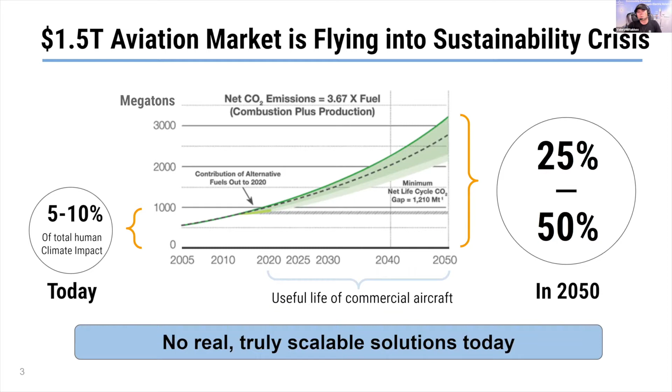So aviation is really becoming this outlier, and there is no real solution today. If you go to the large airlines, large operators, all they talk about right now is offsets and carbon offsets, carbon credits, trading, and all those things, which are all fake sustainability in our opinion. So we really need to solve this through technology.

As you know, everybody wants to fly. As soon as the quality of life increases to a certain level, people want to get on the plane, want to go on vacation, want to go to that business meeting. A lot of new airports are built in the developing world, in China - a huge number of new airports.

Everybody wants to fly. And then, as presented in the previous panel, the whole 3D sort of personal transportation revolution is upon us and will be coming in. Of course, here is the Fifth Element - nice movie, for those who haven't seen it - but very visionary, and that's what we're going to have. That's a lot of additional aircraft in the air. So we need to solve it.

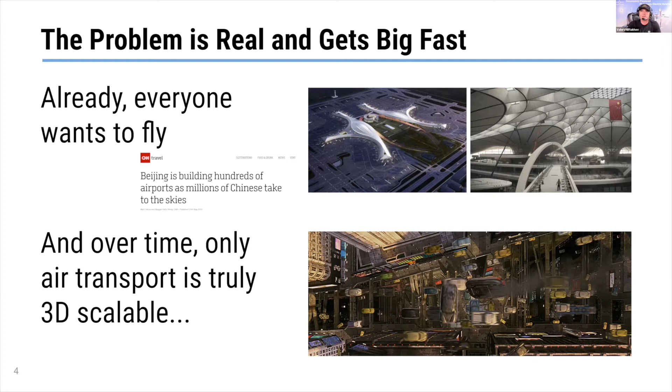So how do we solve it? There are basically 6 different ways to think about it. We at ZeroAvia, as we started about 3 years ago, did this thinking from the first principles perspective. I'm a physicist myself, PhD in physics. My management team is similarly suited as well, and we looked at the fundamental physics of various solutions.

So of course you have batteries - this is the first one here. Then you have turbine hybrids. Then you have biofuels, then synthetic fuels. Then you have hydrogen turbines, which is interesting - we'll talk a little bit about it. And then hydrogen electric, hydrogen fuel cell, and electric motors. We looked at all of these from a fundamental perspective - energy density, efficiency, theoretical limits, all of that.

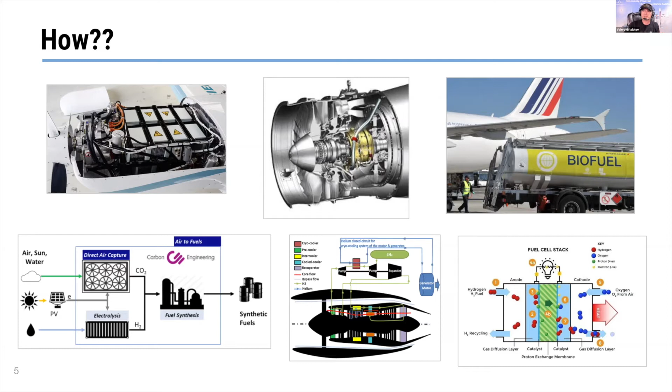And this is what we found. On battery electric, we just have fundamental blockers - and again, I'm not going to spend a lot of time, we already talked about it, energy density and all of that. In addition, cycling material, sourcing issues and whatnot. Turbine electric, yeah, could work, but it doesn't really make any sense - you're not extracting any significant fundamental improvements in fuel efficiency. Biofuels can't really scale - if you look at plants as a way to convert sunlight into fuel, that's just dumb.

It's not getting any kind of efficiency. It's 500 times less efficient than solar electrolysis on the same piece of land. You're not even talking about the water issues, environmental impact of agriculture, and all those things.

So really, what remains on the bottom is our 3 hydrogen-derived solutions. Synthetic fuels take hydrogen made through electrolysis, zero emission, because no other way of making hydrogen will really scale. So you make hydrogen in each of those cases. In the first case, you have a chemical plant to convert that hydrogen into synthetic fuel. The benefit is you can use that synthetic fuel in existing engines and call it a day, at least on the CO2 emissions basis.

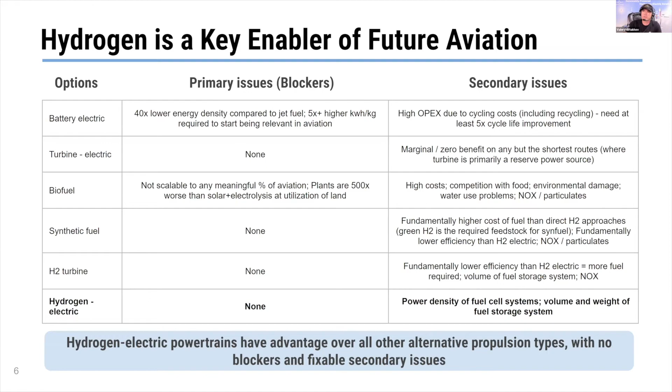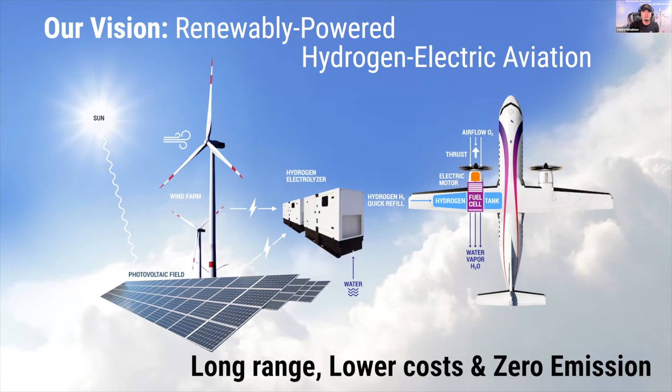So with that, our vision is renewably powered hydrogen electric aviation: make hydrogen on site at the airport from local renewable supply and fuel the planes right there. We can deliver not only zero emission, but also lower costs, and match the range of fossil fuel aircraft through that.

We also think this product is going to be better than jet engines, similar to how electric cars are better products compared to gasoline cars, even internal combustion cars. Hydrogen electric aircraft will be a better product compared to fossil fuel aircraft.

You have lower and stable fuel costs. The industry today spends a lot of time and money hedging against fluctuations of oil prices and whatnot. None of that is here, electricity is a much more stable commodity. Even if you don't source it from dedicated renewable arrays, if you have a dedicated renewable source, then complete stability. Lower maintenance costs, again electric powertrain versus internal combustion, high pressure, high temperature, lower noise levels from electric powertrain.

And ability to build more efficient airframes. Once you have electric propulsion, you can think about distributed propulsion. You can think about various solutions on thermal management and how you deal with drag. So more design space opens up.

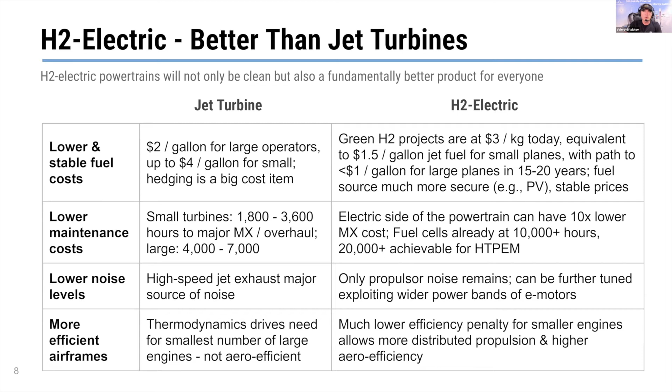It was great to see over the last 12 months, especially that hydrogen momentum is accelerating. We were participants in this study that the European Union put out together with McKinsey earlier this year in May, that basically said the future of aviation is in hydrogen, and we were profiled in that study as well.

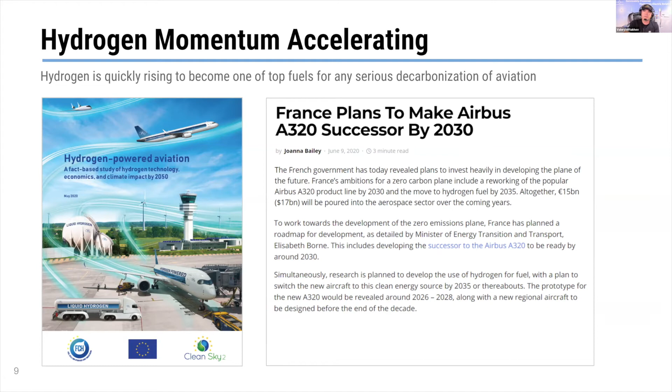So this is what we are working on. We're a power plant company, we build engines. We also have a big play in infrastructure, I'll talk about it a little bit later. But for now, focusing on powertrains.

First commercial offering, 600 kilowatt powertrain, goes into aircraft like this, 10 to 20 seats, 500-mile range. And then we go from there into larger and larger aircraft, longer and longer distances. By the end of this decade, we will have 100-seat, 1,000-mile aircraft in the air.

So we're not just talking about it, we're actually doing it. On the bottom, these are actual things we're doing. We built our first prototype last year in 2019, flew it here in the United States. Then we won a major grant in the UK and built up operations there.

We built our second prototype there, started flying, and 2 weeks ago on September 24th, we had the first flight of the world's largest hydrogen electric aircraft, a 6-seat Piper, pressurized airframe, 2-ton aircraft. And later this year, in a few weeks I guess, we'll be demonstrating up to 300-mile flights on that platform.

And then later this year as well, we're switching over to the 19-seater aircraft. What you see on the picture is our first commercial offering, a 19-seat aircraft, starting testing of a 600 kilowatt system. Flight test next year.

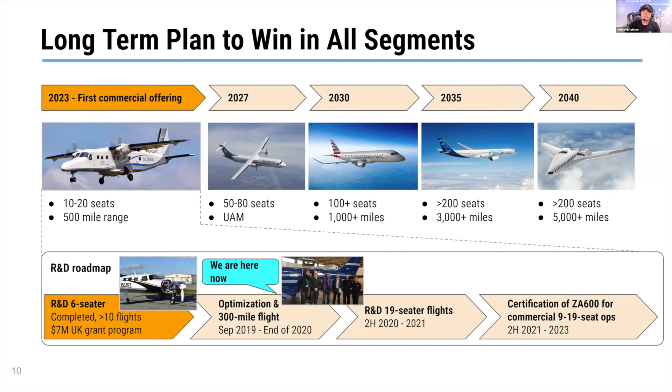We're also part of a new initiative that the Prime Minister set up, and this is our kickoff meeting here earlier this year, in September probably, or August, where the initiative is about getting a 100-seat jet in the air by 2030. If you remember from the roadmap, this is exactly what we're planning to do.

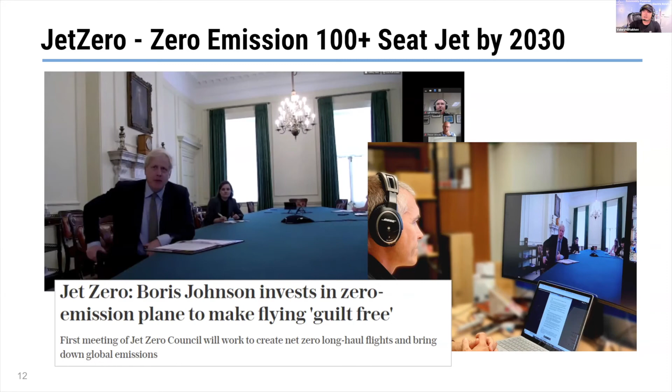We are one of the 5 aerospace companies on this council, alongside Rolls-Royce, Airbus, and similarly sized majors. So we're doing something right.

As I mentioned, in addition to the powertrain, we're also building the hydrogen airport refueling ecosystem. This is all real hardware that works today at our R&D facility in the UK, Cranfield Airport, about 50 miles north of London. A renewable array was already there, so we're just feeding off of it.

We built the electrolysis system, the on-site storage, transfer pumps, and the fuel truck that you see here on the picture on the top right, that is running around the airport, similar to what you see at airports with fossil fuel airplanes. They're fueled by fuel trucks showing up and putting fuel in your plane. Same thing here. We already have it.

It works. We partnered with Toyota for some ground vehicle support, as they gave us an initial first Mirai, and we're getting a second one pretty soon to do demonstrations of how our fueling infrastructure can be used for various types of mobility, not just in the air.

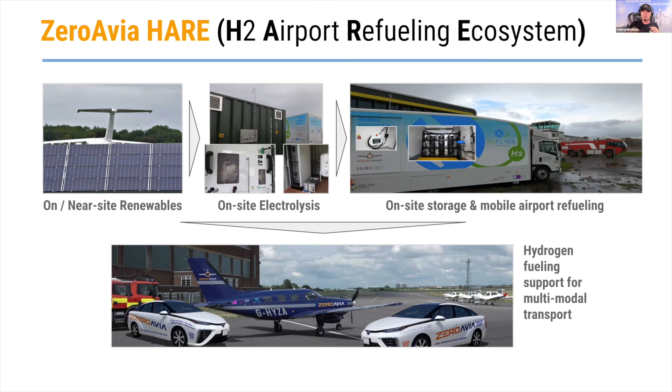We think that over time, hydrogen production and refueling infrastructure built on airports will be the starting point or nucleus for infrastructure for other types of transport. Airports are natural transportation hubs. People show up there, goods show up there, trains come in, trucks come in, cars. It's a great place to have production and distribution of fuel, and we're already doing it.

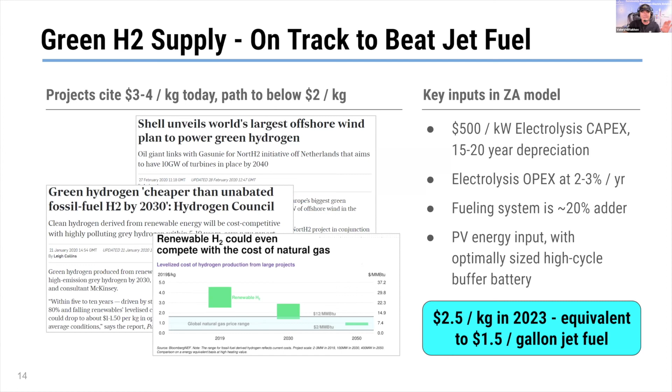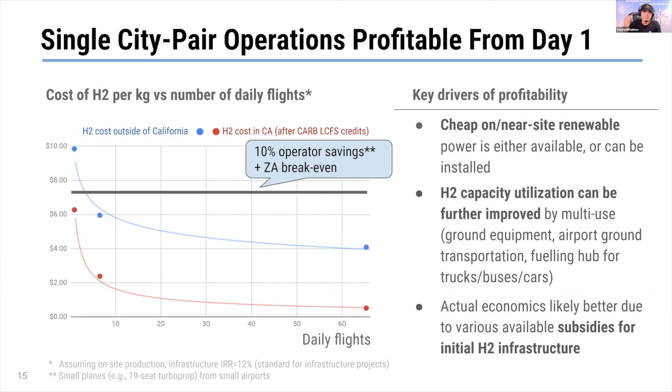And by the way, that will mean that we are beating jet fuel pricing, at least pre-pandemic levels jet fuel pricing. We've also done a lot of analysis and modeling and real quotations for the infrastructure with various people, large electrolysis companies, and we can show that we can not only get the economics at scale, but also scale profitably, especially with small operators that pay a lot higher jet fuel prices than United or Korean Air and other large carriers.

Overall, the fuel market is very attractive. As I said, $200 billion today in fuel. We think we can, over time, move the entire aviation industry to hydrogen, and that is a huge market, 50 to 100 megatons of hydrogen a year. This looks large, but 100 megatons is what the industry makes and uses today worldwide.

Fertilizer, oil refineries, industrial use cases consume, I think last year, over 80 million tons of hydrogen being produced, stored, and used in those processes. So the industry knows how to make it, store it, use it, and safely handle it. This would mean doubling it by 2050, but it's not starting from zero. It is a huge new market. So we have a lot of large fuel companies, large industrial gas companies, very interested in this potential.

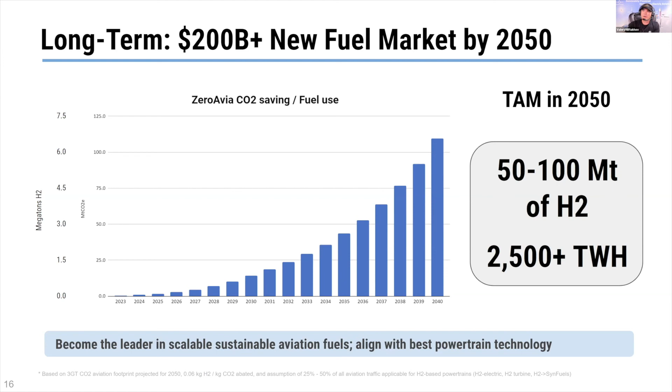Since we have been so active in the market and actually have done a lot of tangible things, we have hardware in the air. We're the only company that has hydrogen fuel cell aircraft of this size up in the air, and we want to continue that leadership.

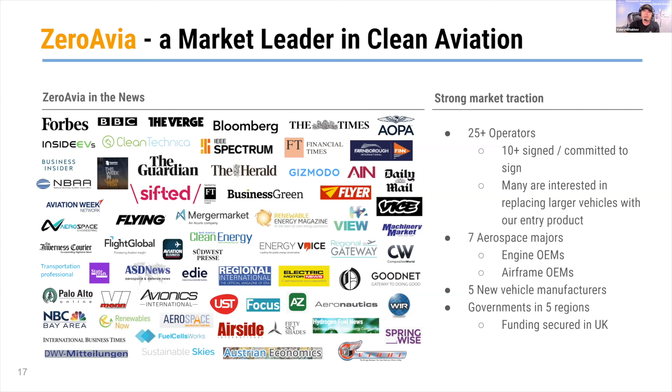We got a huge footprint out there, captured attention not only of the media on the left here, but also on the right with the operators. We have a number of signed LOIs. We have discussions with all the majors, well, not all, but many majors, new vehicle manufacturers, and the governments. I already mentioned the UK, and there's some other governments that are looking to support us.

So I'll stop here, see what questions you have.

So this is the message I want to leave you with: it's not only the future, it's reality and it's becoming real, and we're making it happen.